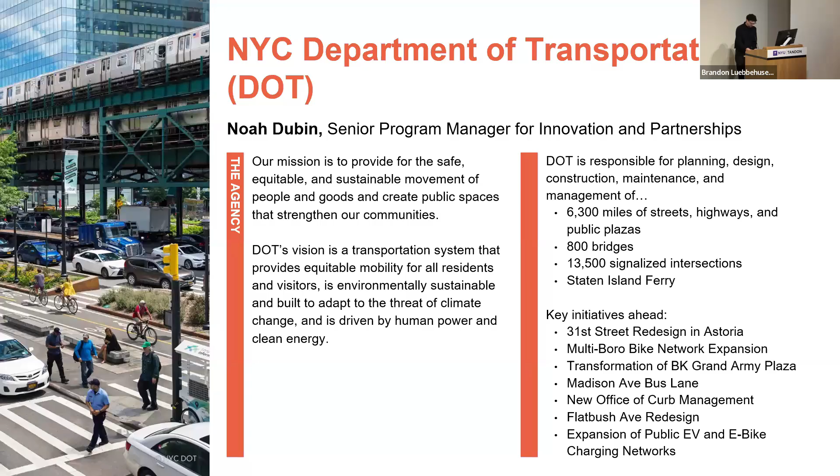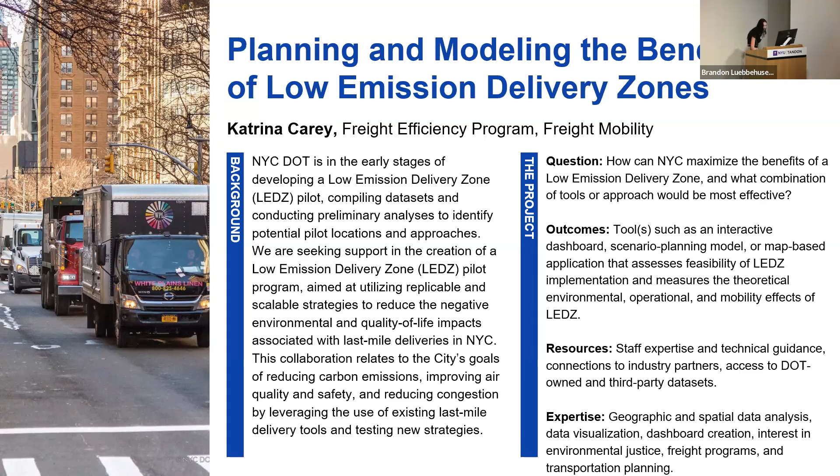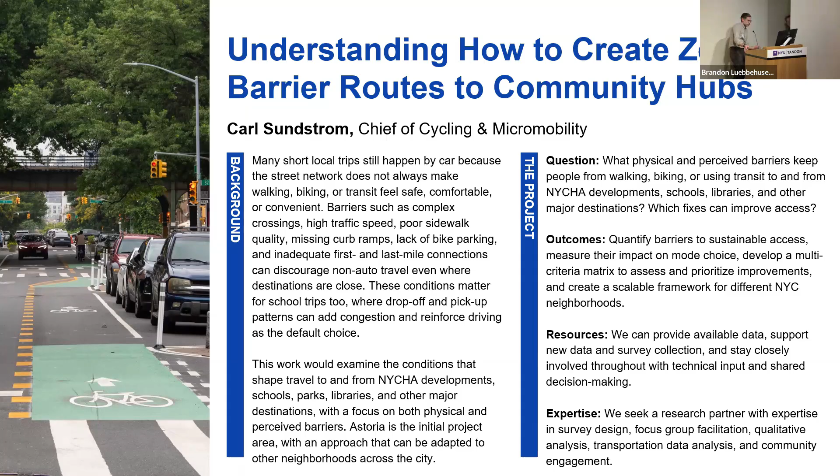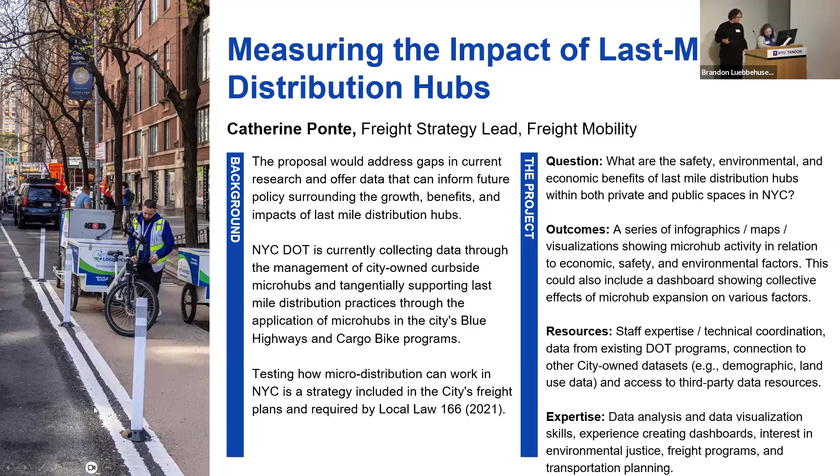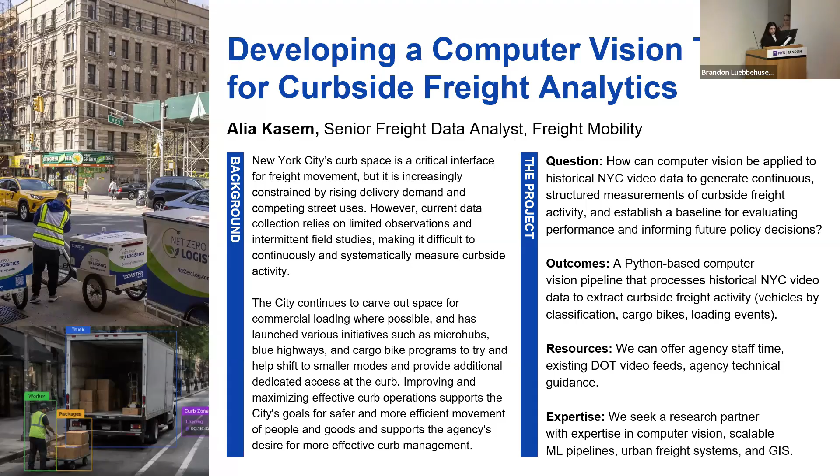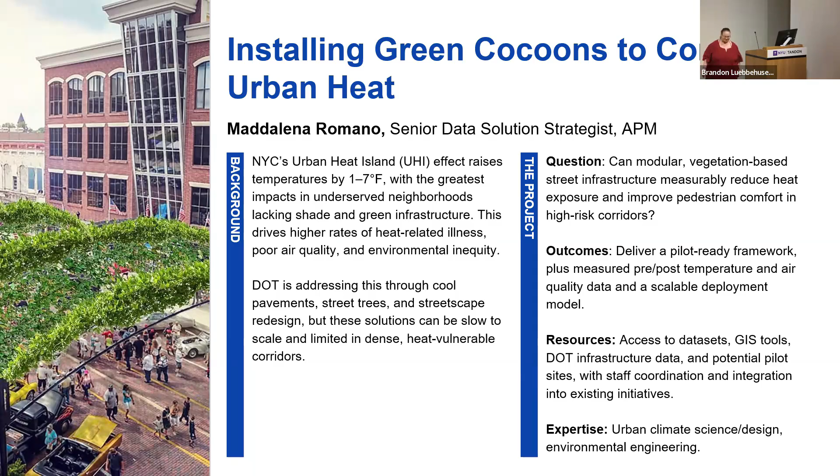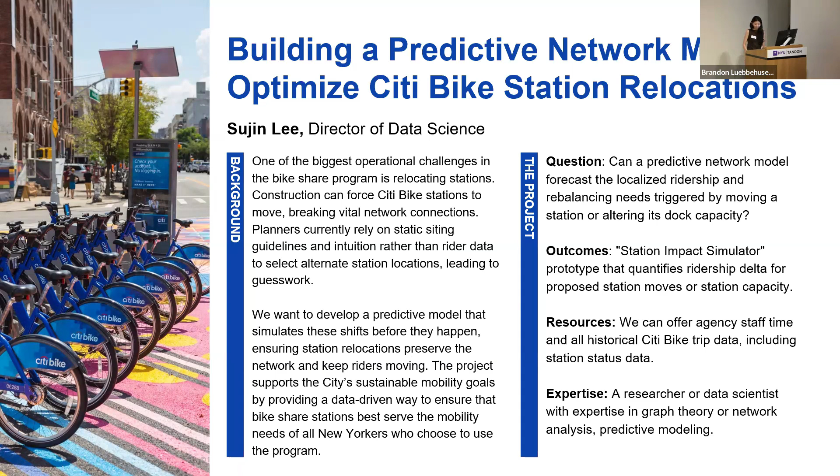DOT is charged with the management, maintenance, and operation of over 14,000 parking meters and 400,000 streetlights and signal poles. So the scale we're talking about is immense.

This is critical infrastructure in the city. With parking meters, it's responsible for $250 million of revenue.

While the city is moving toward asset-light solutions like mobile payment, having a parking meter is critical for regulating the curb. Same thing with streetlights, providing lighting, ensuring safety, visibility, and management of the streets.

Because these are essentially pieces of steel mounted on the street, typically in cement and concrete, they are exposed to the elements. I'll try to politely put what it is exposed to.

So moisture—if any of you saw the flooding yesterday, we get a lot of flooding, we get snow, we get a lot of water infiltration in and around this infrastructure.

There's also a lot of chemical exposure. Over time, these create structural integrity issues, corrosion, and thickness loss.

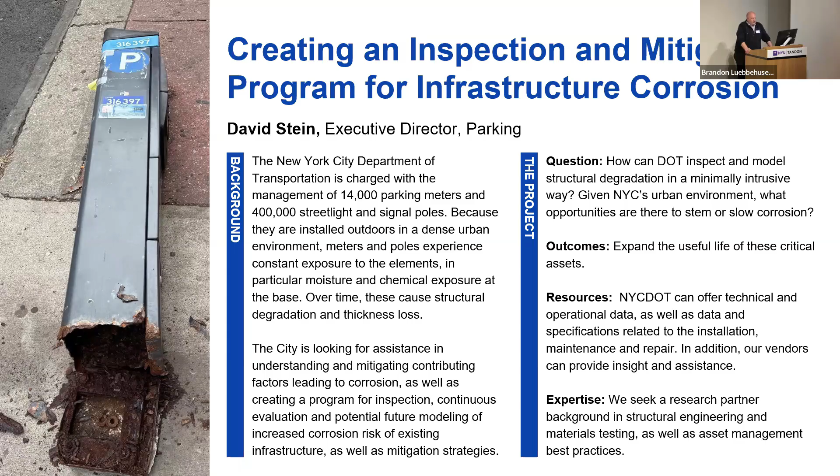So we are looking at a research partner with a background in structural engineering and materials testing, as well as asset management best practices. Thank you.